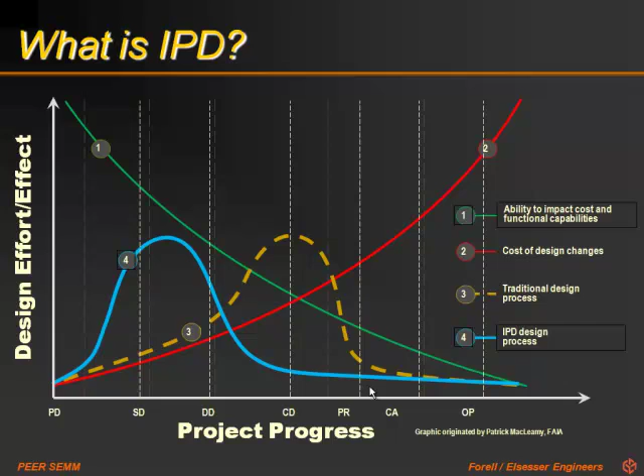So the blue line indicates what we strive for in IPD, meaning a lot more design effort and collaborative thinking goes into the project early in the design phase, which means that ultimately, as we get closer to the end of the project, there's very little need for influence in design, and very little need for cost increase. So this is kind of what IPD strives for.

So naturally, a collaborative process. The goals are aligned because all the team members have a seat at the table. They all collectively develop ideas, validate them, and monitor their progress. And collectively, the team has control of the project.

It's not in the hands of the owner, the contractor, or the architect alone—it's in the collective control of all the team members. As a result, there is a shared risk and reward potential depending on the outcome of the project. This by itself becomes a huge motivator for everyone to deliver not only what the project asks for, but even more, because at the end of the day, we all have skin in the game, and we all get something if the project goes well.

IPD requires a broad understanding of design and construction issues by all design and construction team members. As civil engineers and structural engineers, you're going to need to know more than just designing a building. You'll need to know something about construction, construction management, and architecture, in order to collaboratively work in this environment. This is the cultural shift I'm talking about that will impact all of us down the road.

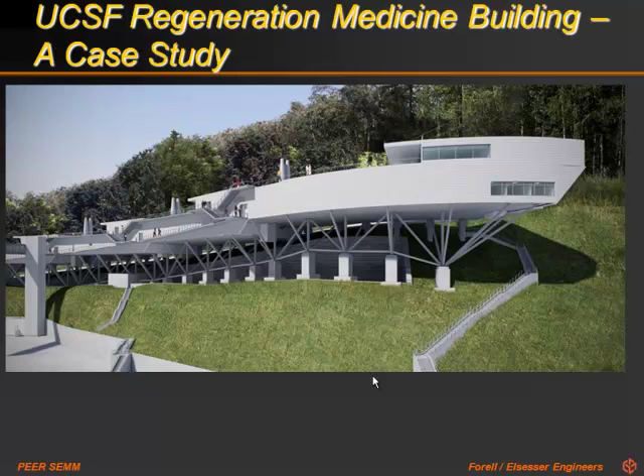So now, with that background, I want to tell you about the project. As you can see, it's a very dramatic building. It's designed, the design conceptualized by a very famous architect, Raphael Vinoly, from New York. It's a design-build project, as I mentioned, with principles of IPD infused in it.

The design-build process has several models. The one we used here is the bridging model. It means there's an early bridging team who conceptualizes a design, and then another team—a design-build team—comes forward, implements the design, completes the design, actually performs the design, and then takes it to construction. So our team, Forell/Elsesser, with DPR Construction and Smith Group architects, were the team who came in the second half of the bridging process to design and deliver this project.

We had several members, and I've noted the key members who were there from day one as we were competing for the project, which we did. The building is nestled on the south side of the campus, for those familiar with the Parnassus campus, in an area no one would have ever thought you could build a building. It's just a very difficult and challenging site.

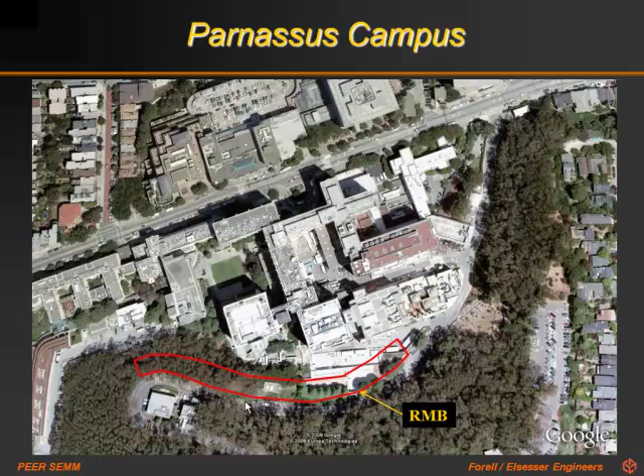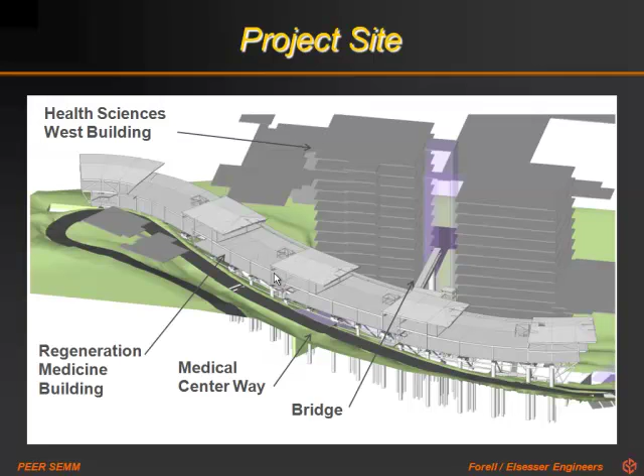The project cost is $119 million, and the California Institute for Regenerative Medicine gave $35 million to the university in support of this building. With that funding came a string attached—a beneficial occupancy of the building by a certain date, meaning that if the university didn't occupy the building by that date, they would not get the $35 million. So that became the actual driver for the project and what we had to do in delivering it.

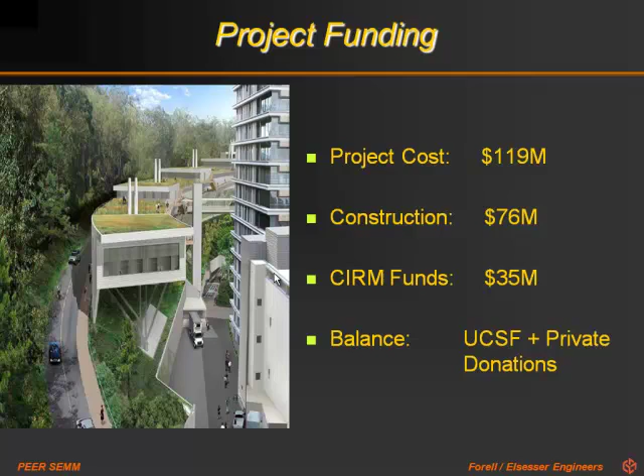As I mentioned, the design is very brilliant in that it actually uses this very difficult site to deliver a project so important to the heart of that research campus and to the hospital. But unfortunately, it was $20 million over budget when it was first conceived.

And the university and the bridging team worked very hard on bringing the project to fit the budget, but they couldn't. This is when the university decided to come up with a design-build approach and a competition to deliver the project. So our firm, along with our partners, participated in this design-build competition process. And we came up with several innovative ideas that allowed us to cut $20 million off the project and also reduce the overall project schedule by 2 years, which is an incredible accomplishment.

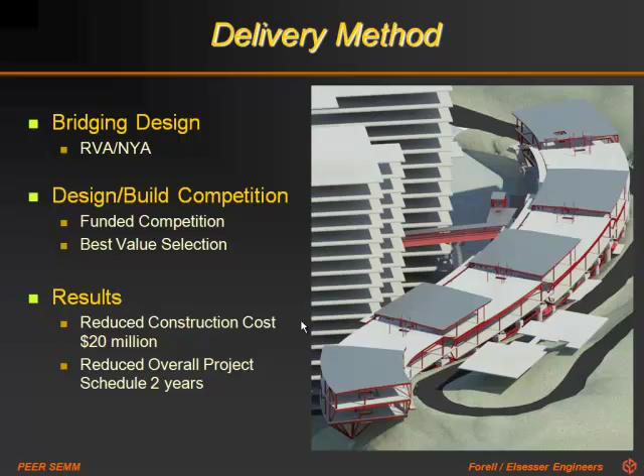It meant that we had to juggle several balls in the air. We were designing, our design was being reviewed, the contractor was fabricating what we were designing while we were designing the rest of the building. It was just one of those projects that required amazing management of what we were doing and also integrating it with the other design team members, which I really believe would not have been possible had it not been for the way this project was being delivered. If it was a design-bid-build project and somebody gave us this amount of time to design the building in a vacuum, in our own silo, we couldn't have been able to deliver that.

The IPD characteristics of the project naturally created a very collaborative work environment, because we as a team competed for the project, we as a team won the project, and we as a team worked on the project to its ultimate success.

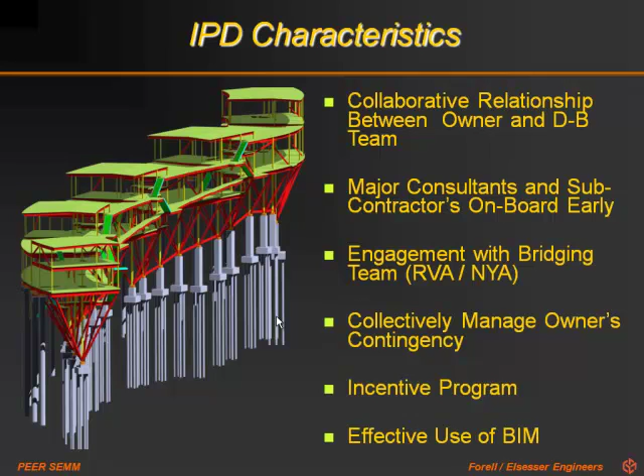All of the consultants and subcontractors were on board early, the ones who could really make a big contribution. The original bridging team was engaged throughout the process. They were there in a review capacity, to be sure that the architectural design idea was being implemented. Why? Because that's what the university bought, that's what a lot of the donors wanted, and if we were to change that, it would disrupt the delivery of the project.

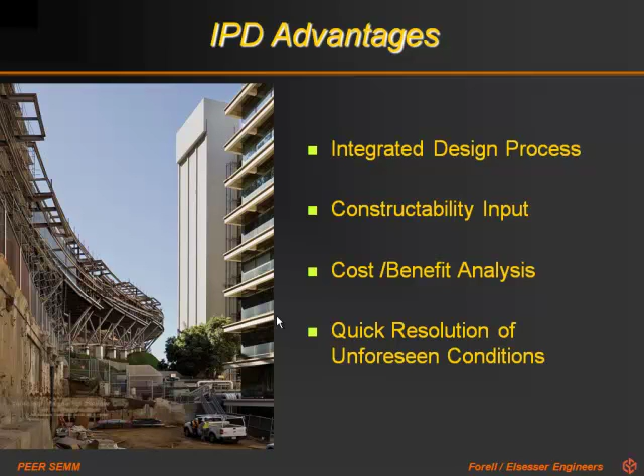The IPD advantages became that we had the constructability input from the contractor early in the project. Together we discussed the cost and benefit issues of various options that we were studying for the structural design of the project, and naturally a quick resolution of unforeseen issues - and there were many unforeseen issues because of the very aggressive project schedule that we had to follow, and because of the difficult site that we had.

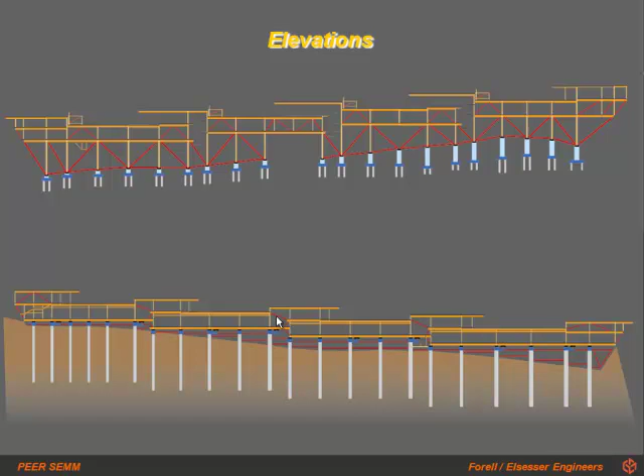Well, looks like my plan views didn't make it in the transition from my computer to this computer, but elevations made it. You saw an earlier plan view of the building - as I said, it's a kind of serpentine-shaped building. In elevation, basically the building is essentially a single-story building with some portions that have a second story overlooking some green roofs. The superstructure is supported by a three-dimensional truss system, steel truss system, supported by isolators that are then supported on pedestals and drill piers. I'll have better views of this for you in detail later.

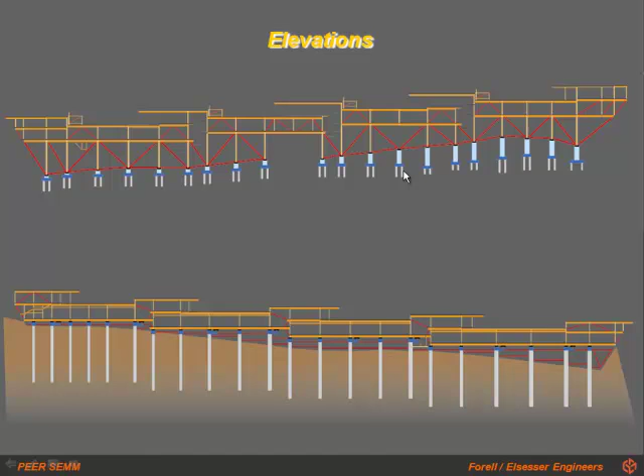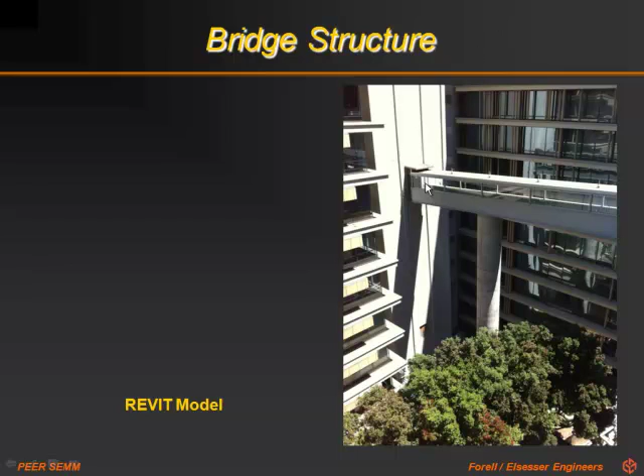There's a bridge that connects the building to the adjacent building and to the heart of the campus. Looks like my Revit model also didn't make it. Sorry.

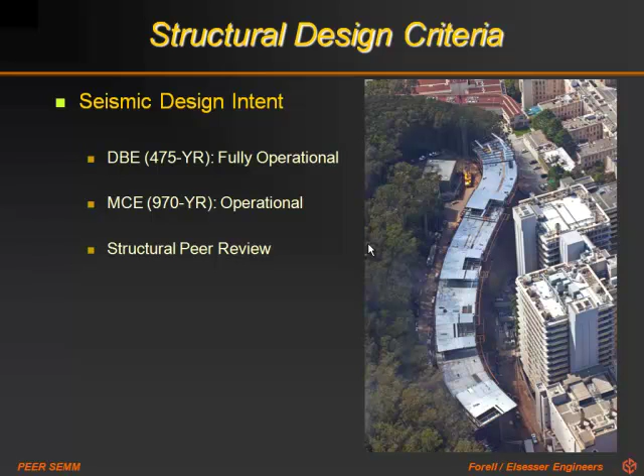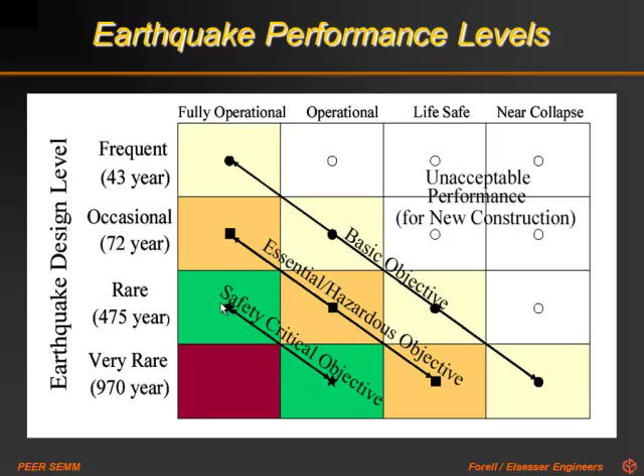The performance criteria was that the building had to be fully operational in a design basis earthquake in a 475-year event, and operational in an MCE event. The project was being peer reviewed by the bridging team. Now, when we design conventional buildings, we're always operating in designing for life safety in, let's say, the 475-year event - that's what most conventional code-compliant buildings are. When we have to deliver a better performing building, such as this one, to be fully operational in a rare event, it becomes very difficult to use conventional structural systems and achieve that objective. That's why this building is base isolated - that's one of the reasons why it's base isolated.

Typically, if you think of the design basis earthquake and what the code requires for design, there's always a big gap between what we design for and what the real earthquake will deliver to the building. The question is how do we bridge that gap? Also, the gap is obviously much larger in this zone compared to the zone where base isolated buildings will lie.

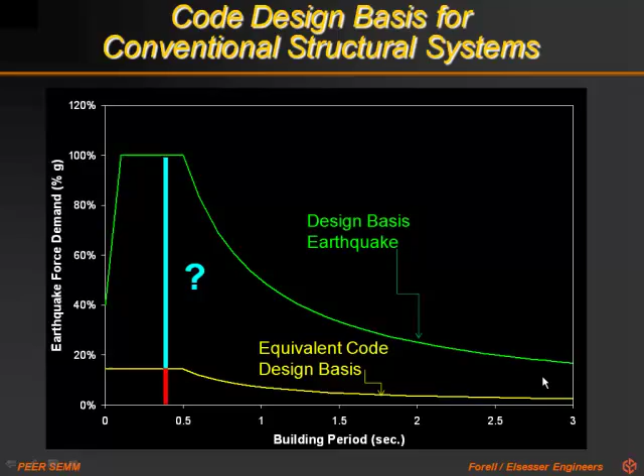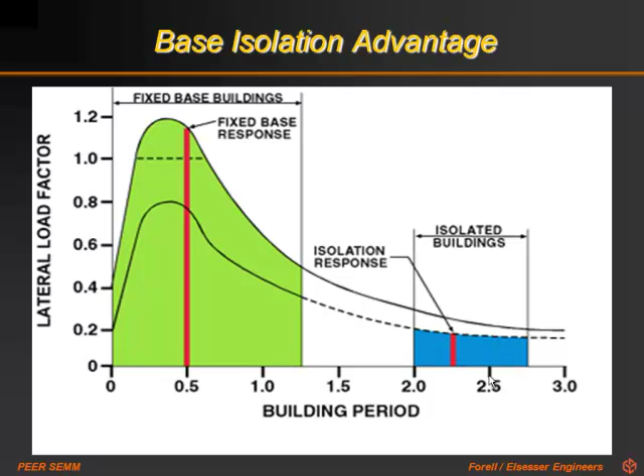For those who may not be familiar with the basics of base isolation, I'll spend a couple minutes. Base isolation is a way to alter the dynamic response of the building by shifting the period of the building to be longer as opposed to shorter. By doing so, the first advantage is that we reduce the dynamic response of the building by way of isolating it, and then damping and other factors reduce it even further.

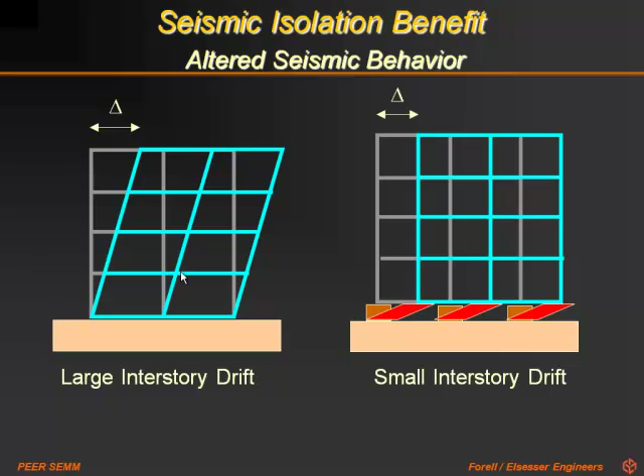The other advantage of base isolation is that it allows the building to move as a rigid body above the isolation plane, as opposed to having inter-story drifts of one floor relative to another that cause damage in the process. I'm happy to answer questions later if you want to know more about base isolation.

The type of isolators that we used is the triple friction pendulum. This is showing the isolators in place, and this is showing a prototype isolator being tested.

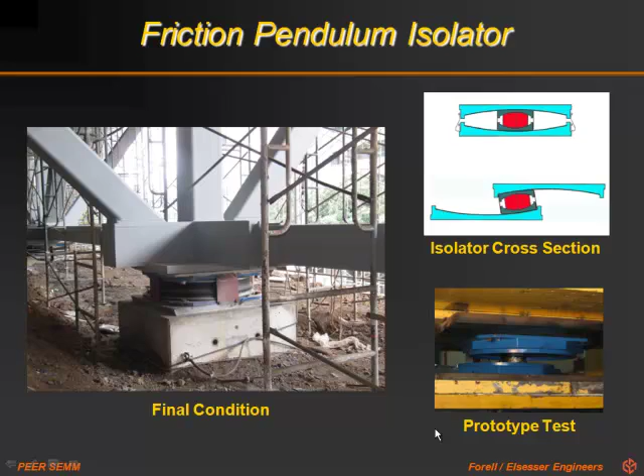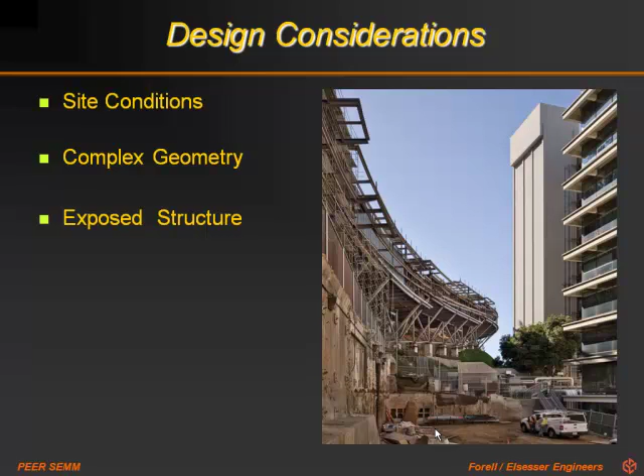The global design considerations were site conditions, the complex geometry of this building, and the exposed structure, and I'll tell you what I mean by the exposed structure.

Site conditions: it's a very steep hill, steeper than 45 degrees. The site is unstable, it has sliding issues, and there is an existing pump house right underneath the building we're trying to build, which feeds the UCSF hospital. So at all times we had to keep that operational as we built our building around it.

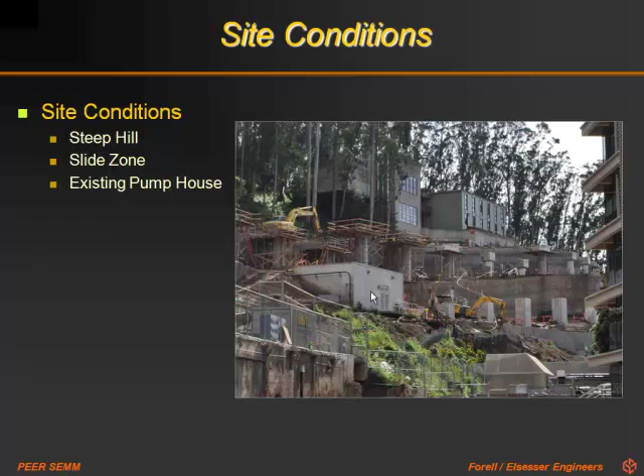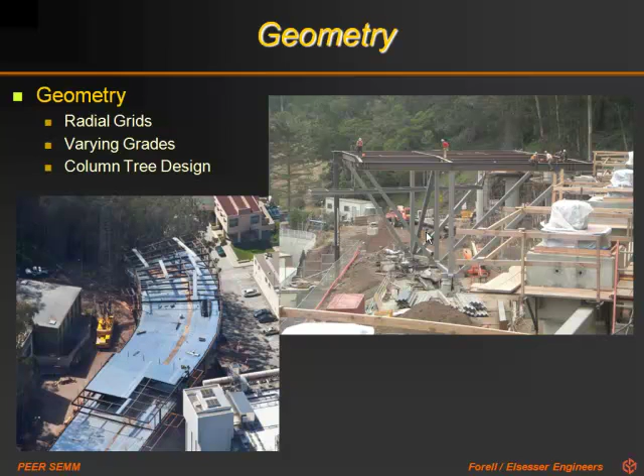The geometry, you've seen some images of that. Obviously the radial grid, the varying grades, the fact that the building stepped up, and the column tree design. We had to be very creative in coming up with a column tree configuration that was actually buildable and economically buildable. These are some of the actual connections that we had to come up with.

They're all sealed because this building is in a very corrosive environment, and we had to make all these connections sealed so that the structural members are not compromised later because of corrosion.

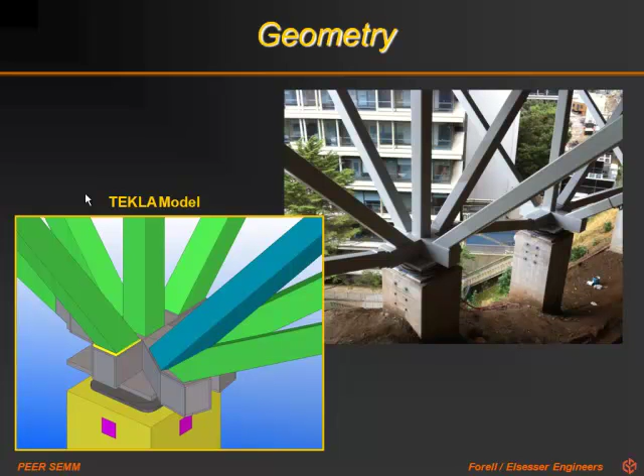We used the Revit model to model the entire building, and the contractor used a Tekla model. Tekla is another building information modeling software that tends to be more popular with contractors. So knowledge of both software in this day and age is a very useful thing.

The exposure requirements - this is a typical day at UCSF. They tell us the sun does shine occasionally, but every time I've been there it's looked like this, hence the picture. And every time we brought a piece of steel, within a week it was rusted or showed some beginnings of rust. That's why we had to be extra careful with our connection details, etc.

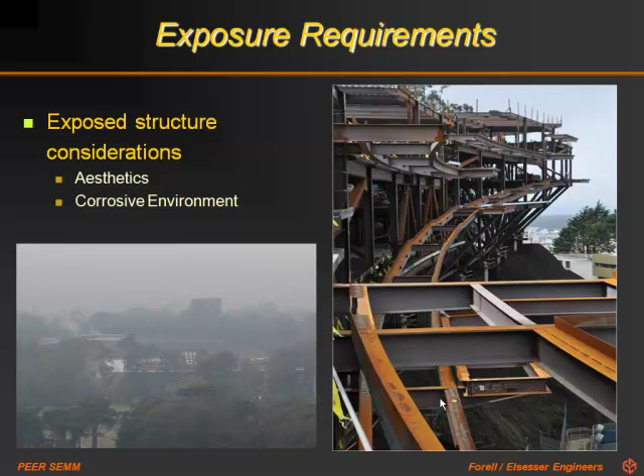Other challenges: drill pier properties. Because the site is unstable and has varying subgrade conditions, the drill piers had to have different diameters. Because of the sloping road and the stepping building, the projection of the drill pier above grade also varied - some were above grade by about 20-some feet, some only a few feet.

As a result, they themselves had a displacement that varied, which we had to worry about. It wasn't like having a base isolated building on flat ground where we don't have to worry about the displacement of the substructure. In this case, we also had a few inches of displacement to worry about that varied along the length of the building.

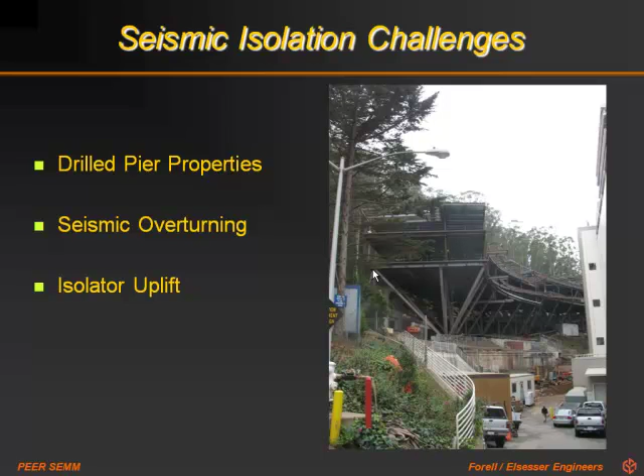The seismic overturning - because of this configuration, the fact that it was a very narrow building with very little dead load on the uphill side, the building had a tendency to overturn. We worked very hard to come up with a way to restrain that uplift.

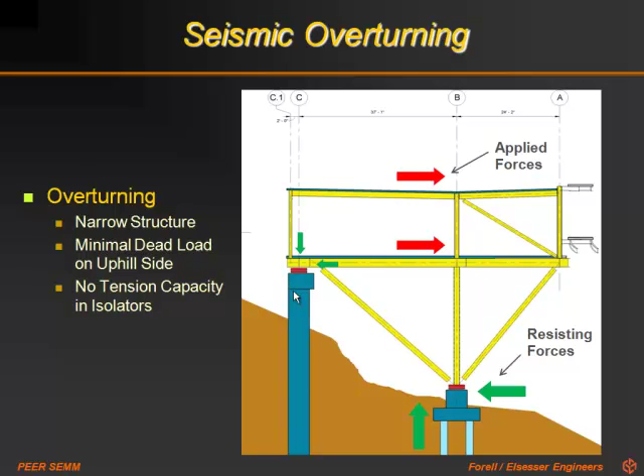I mentioned the drilled piers and the variable height. This illustrates the overturning issue and the narrow structure, and how this building will have a tendency to uplift because there is so little load. The majority of the load goes down to the isolators at the bottom of the hill, but the ones uphill see very little dead load to counteract the seismic overturning. And as you know, isolators have no tension capacity - this variety especially has no tension capacity - so we had to look for an external way to resist the uplift.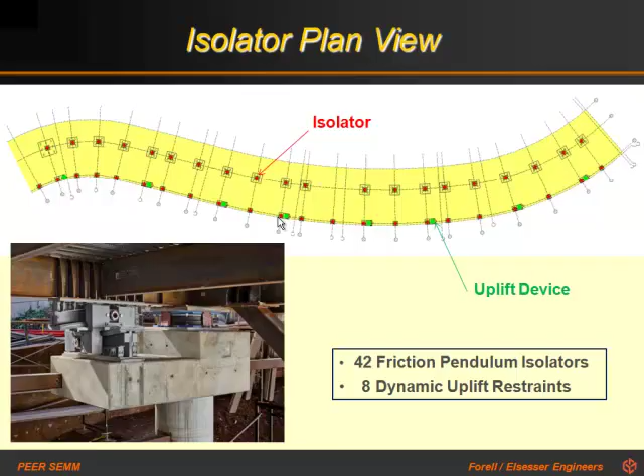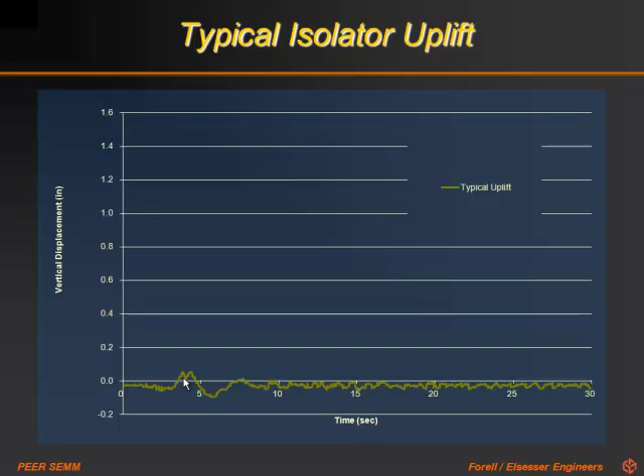Just to illustrate the uplift issue, in a typical isolated building you would see some uplift, perhaps at the corners of the building. If the building has a more favorable geometry and configuration, you can perhaps get uplift in one instant over the time history of the earthquake, and that wouldn't be detrimental to the performance of the building, so we would accept that in our design in those types of situations.

In this case, because of the reasons I mentioned, the uplift was actually a much more serious issue. Not only did we have large uplift occurring on that side of the building, occurring in multiple cycles, but it would also tend to stay up for some period, and in that time the building would actually be moving 26 inches, which was the maximum displacement.

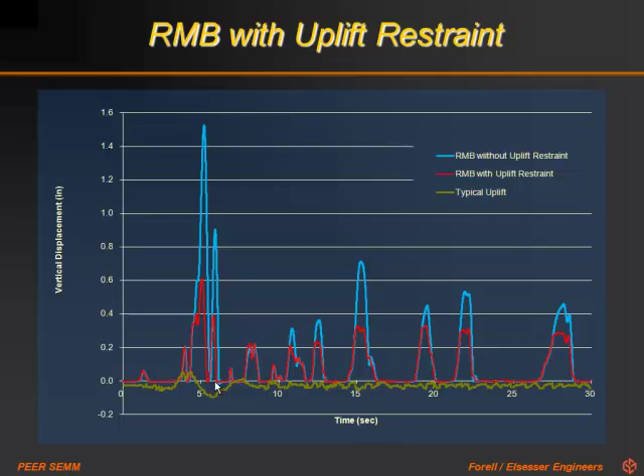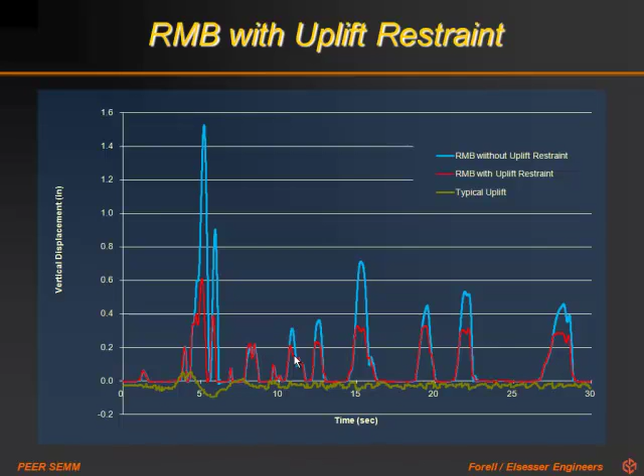So we knew we had to do something more effective to resist the uplift. By adding the uplift restraint design, we were able to limit the uplift to much smaller numbers, ones that could be accommodated by the device we're using, and I'll explain what that device was. The isolator manufacturers actually do make tension-capable isolators.

This particular manufacturer does have a tension-capable isolator, but they're custom-made, unique to their process. In order to build the 8 tension-capable isolators we needed, they would have had to stop delivering their garden-variety isolators and change their processes to deliver these 8. It seemed like that wasn't going to be possible within the very tight schedule we had for this project. So what we did was we invented our own.

We had some ideas, and some of you may know one of our principals at our office, Mason Walters, who came up with this brilliant idea of a new uplift restraint design that had never been used. The evolution of this process started with a hand sketch that Mason came up with, and then he actually built a wood model overnight in his garage. This is a third-scale model.

It's basically modeled after roller skate rollers that he found in the neighborhood hardware store, and everything else was scaled around that. In order to illustrate the concept, both internally and to present to our client, we made this wood model, which was an extremely helpful way for us to communicate a very complex technical idea.

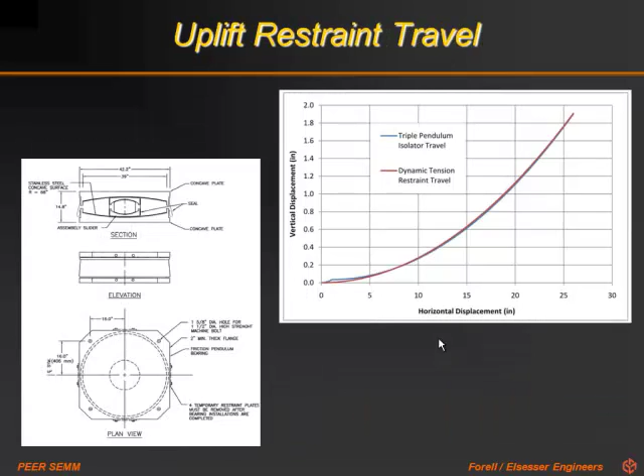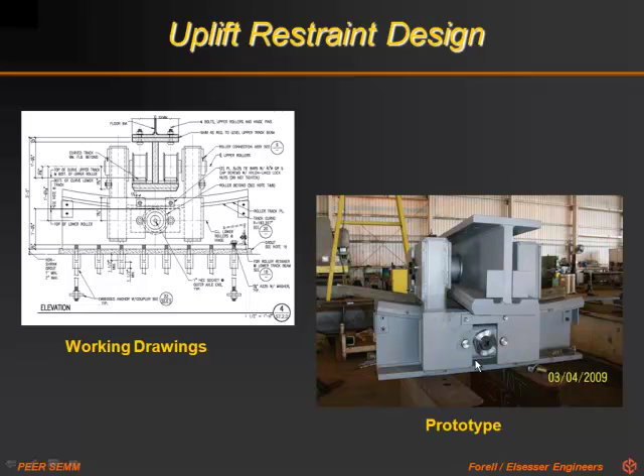We then started making more detailed drawings, then built a prototype of this restraint device, which was tested at UC San Diego. We validated the uplift restraint characteristics through this process.

We also had several electronic models along the way, which were very helpful in communicating the idea to various stakeholders. Basically, the way this works is that there are 2 sets of rollers on perpendicular axes to each other, connected by this connector system.

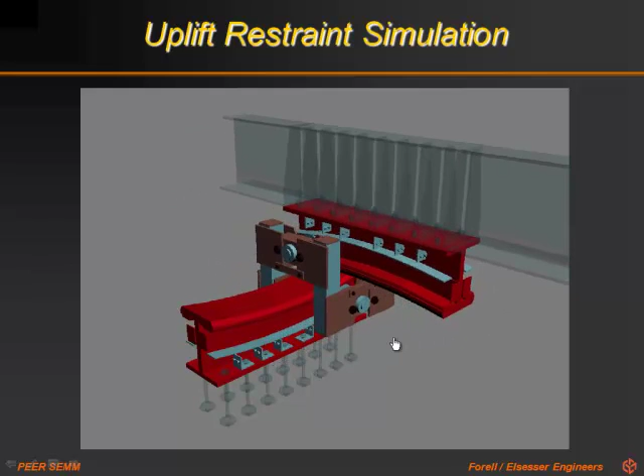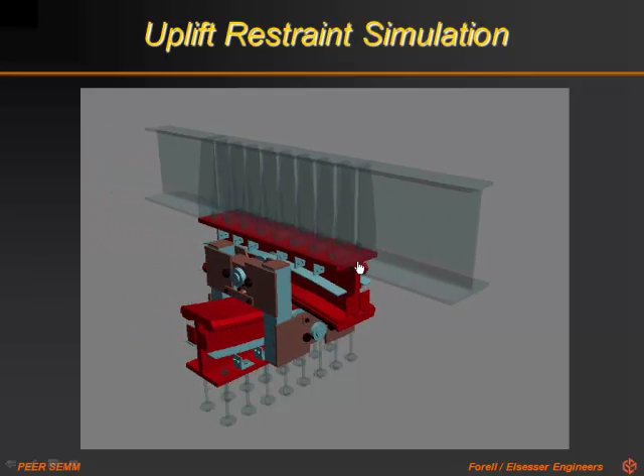This connector assembly is also articulated in 2 different directions, in this direction as well as this one, which allows the isolator to move not just in orthogonal axes as this slide illustrates, but in all different directions. It's a combination of those 2 articulations, but also the pins holding the axle that connects the rollers together have a ball pin at the end, allowing the rollers to swivel out of plane and accommodate movement in all directions. We tested this at UC San Diego.

This just shows one direction of movement, but we actually did test it in all directions, basically following the same footprint, or a similar footprint, to what we had come up with in our design. And this is the uplift restraint in place.

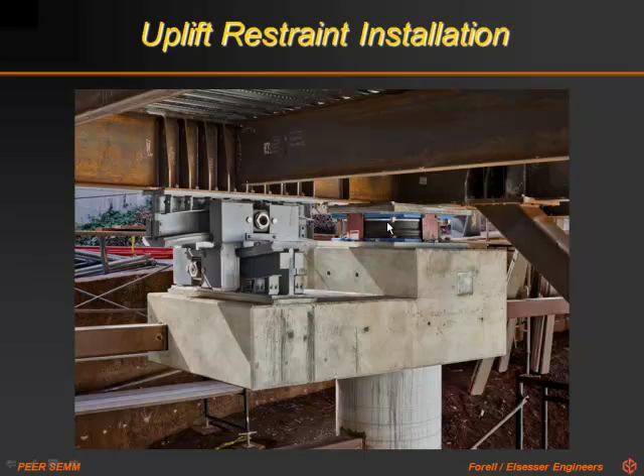It's basically installed right next to a conventional isolator, and in its stationary position the rollers don't engage. There is a gap, and the two rails that are opposing each other have a radius that matches very closely the radius of the friction pendulum isolator. Naturally, when the building moves and tries to engage, the rollers will basically follow the same pattern that the friction pendulum isolators will be following.

So I guess one of the lessons for us to learn was that this kind of invention, which we think is very cool, by the way, and we're very proud of it, would not have been possible if we were designing a building under this kind of aggressive schedule, or if we were dealing with the very constrained and litigious atmosphere that exists in design-bid-build. This is not something we had come up with in the competition phase. In the competition phase, we had assumed the schedule would allow delivery of the tension-capable isolators from the manufacturer. It was something we learned later may pose a risk to project delivery in terms of schedule, and that's why we launched into this in the midst of all the other things we were doing, juggling all the other balls.

The process was very conducive to this innovation, and otherwise we could not have been able to pull this off. So the reason I chose to show this project is because it spawns innovation, and the process actually allows for it.

Before we go to questions, I wanted to tell you something relative to your future engagement with an IPD world, which our office has come up with: a new internship program supporting the idea of integrated project delivery. We're trying to fill a gap that may currently exist in our industry, when students are still, for the most part, studying in a silo-based curriculum. What we're allowing them to do is a rotating intern program. This is something our office came up with two summers ago. We named it ISD, Integrated Skill Development, paralleling IPD, and the goal is to expose students to different aspects of the design and construction of projects.